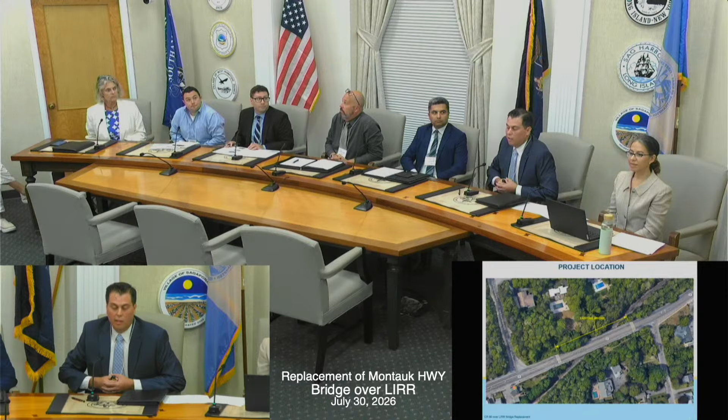Another issue we're dealing with on site is a lot of existing utilities. There are high-tension power lines that run along the railroad corridor to the south. And one thing not immediately evident is a buried utility corridor on a very unique alignment. It starts on the north side of Montauk Highway near Old Riverhead Road, runs along the north, then crosses under the existing bridge and railroad, and runs along the south side of Montauk Highway.

The image is a bit small on the screen, but you can kind of see there's a tree clearing there where this critical utility corridor runs. This is a National Grid gas main that feeds the entirety east of this site, and it's also a Hampton Bays Water District water line. These cannot be disturbed, and they will not be disturbed. We're building around them, maintaining them in place.

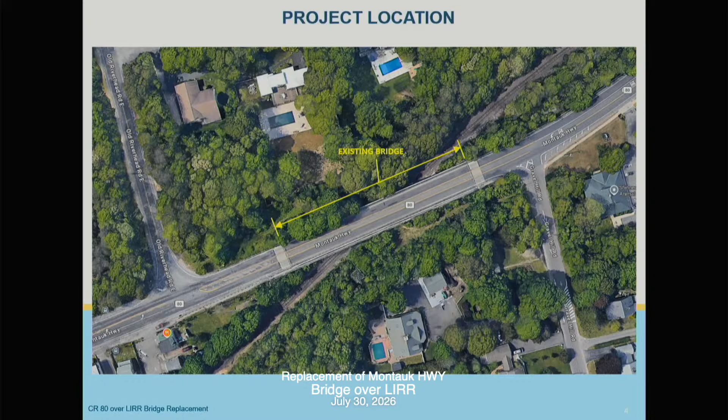Another challenge of the site is the extremely sharp skew of the railroad under the existing bridge. You can see that here - the geometry is very unique. That presented a lot of challenges for the original structure that's there now, and it will present a lot of challenges for us as we work around all these existing features on site.

If we jump down onto the roadway itself and take a look, Montauk Highway at this point is on a vertical curve. That's to get us up and over the railroad to provide clearance for the trains underneath. We have the existing sidewalk on the south side of the structure.

I'd like to point out the two girders that extend above the bridge deck. These are the main two supports - the entire bridge is carried by these two lines of girders. There's one protruding near the sidewalk, and one on the far left side of the screen. Those are about 8 feet deep, running the entire 330 feet of the bridge, supporting the entire thing.

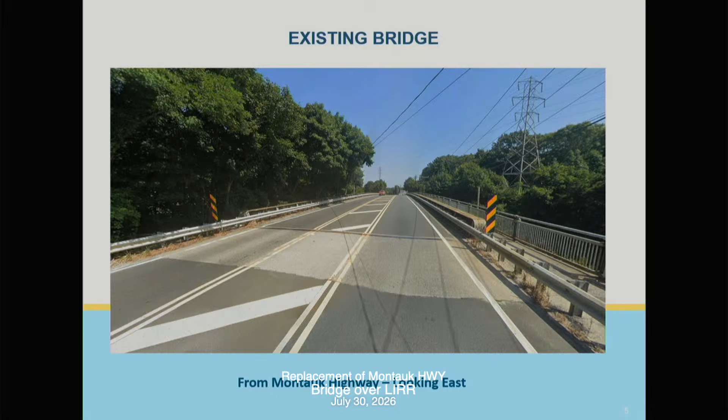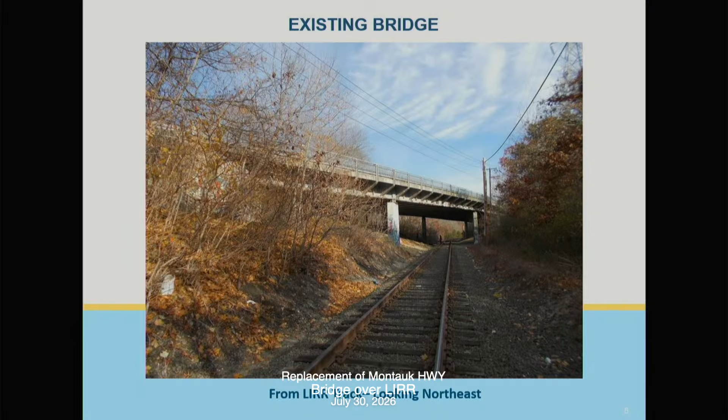Here's a view of the bridge that most people don't see, maybe the train conductor - we're looking at it from the underside. You can see the individual and staggered piers - there are 8 piers here. The bridge is actually a 5-span bridge. The piers we're looking at are staggered to provide horizontal clearance for the railroad as we're looking down the track. They're also staggered to miss that utility corridor running perpendicular to the track, from the northwest quadrant to the southeast quadrant.

I think this image is useful - these rail workers are standing right where the gas main is. That gas main runs down a steep slope, crosses under the existing track, and runs back up the other side of the slope. You also get somewhat of a sense of the scale of this structure. It is massive - demolition of it is going to be a challenge, and it is very uniquely supported with those staggered piers.

So why do we need to touch this bridge? It has really reached the end of its useful service life. It was built in the early 30s, rehabilitated in the late 80s, and as Kyle mentioned, it is the lowest rated bridge maintained by the county.

We have ongoing steel section loss, concrete encasement deterioration, and the bearings no longer function properly. It's inadequately detailed for seismic events, and that sidewalk on the south side is only 4 feet wide, which is substandard.

The bridge is posted for no trucks with overweight permit. These are vehicles that exceed normal legal loads, but at one point this bridge could support those loads. That's a symptom of engineering evaluation, and it's been determined it can no longer support those loads, and that will continue as the bridge deteriorates.

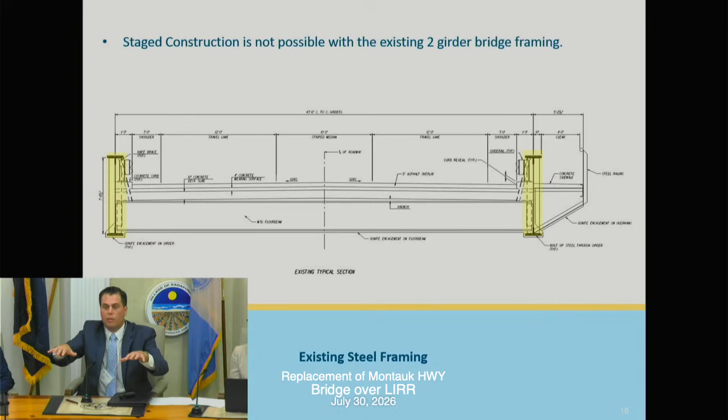We call that stage construction. Unfortunately, due to the framing of this bridge—the two girders that support everything and the deep steel floor beams that run between them—as soon as we remove a steel member, this bridge can no longer support traffic. That's the nature of this type of bridge framing; it's unusual for a roadway bridge.

Another thing we consider, as Kyle mentioned at the beginning, is temporary bridges. I'm going to jump back a few slides—I think it's most useful to look at the aerial plan view. Even for a single lane temporary bridge, the site is extremely tight. To install a temporary bridge, you'll have to realign the roadway locally.

Either north or south, in either case you have significant right-of-way impacts—properties would need to be taken. Additionally, that critical gas and water line corridor buried underground kind of spoils both the north side and the south side. Remember, the northwest quadrant and the southeast quadrant are each occupied by these critical buried utilities. There is a little bit more room on the north side—the utilities are still there, which is an issue, but there's a bit more room.

However, there's an important historical grave site 300 feet from the east abutment, just off screen here. A realigned roadway has the potential to impact that for a temporary bridge, and we're not going anywhere near that site—we are not touching it, we are not disturbing it, and we are staying within the footprint of this bridge that needs to be replaced for safety reasons. So unfortunately, we can't stage construction, we can't install a temporary bridge, and that leaves us, unfortunately, with the detour.

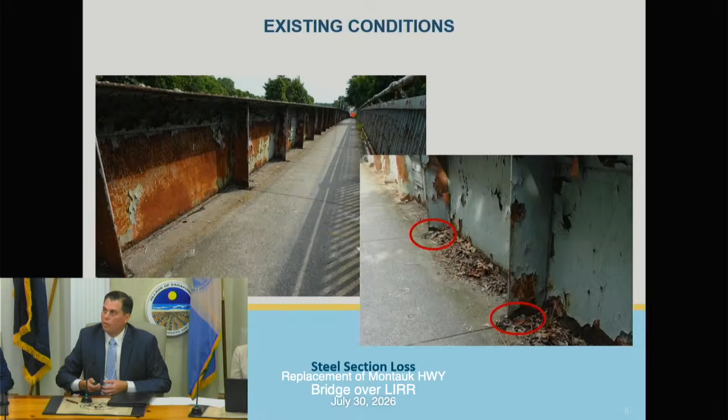Our main objective for the detour is, of course, safety. All of our design, number one priority is the safety of everyone. A second objective of the detour is to minimize it, and that goes to what I was describing as far as that early work, working underneath the bridge, getting as much done as we possibly can before we even need to detour the bridge.

A year plus of construction under the bridge before the detour is in place. Once the detour is required, the bridge is removed, utilizing those prefabricated elements to speed up construction and go as fast as we can.

We also understand that summer is incredibly important. That's the busy time. We don't want to impact summer. We've heard that feedback for some time. The detour is going to take place fall, winter, spring. That leaves us working in the wintertime. Those are difficult conditions for earthwork in particular and concrete work.

It's not the easy way of doing things. Building underneath the existing bridge with the bridge overhead is also not the easy way of doing things, and this is all being done in order to minimize that duration of detour.

Certainly the county and the design team and everyone here understands the concerns with traffic. There's very few east-west roadway options through this corridor. There's only two roads that cross the canal here. That's really just kind of the nature of the site.

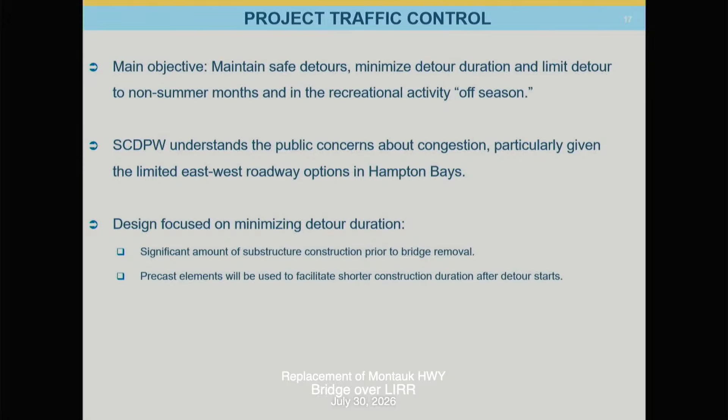Looking at the schedule, we do expect the contractor to be out there on site for up to two years. That start would be basically three years from now, summer of 2029. But the detour itself wouldn't start until fall of the following year, over four years from now. Again, there's a lot to do on the underside to prepare this site to accept this new structure configuration.

The estimated time for them to be off-site is summer of 2031. They can get the roadway reopened and go finish up some things while traffic's back on the bridge, away from the site. So that's your two years.

So it looks like seven to eight months of closure. The way I think of it is just after Labor Day and hopefully well before Memorial Day. Of course, a warm winter would be helpful. So if anyone knows any tricks for that, that would be good.

In order to facilitate the traffic movement through this detour, we're proposing temporary signals at Ponquogue and Fanning, at Wakeman and Fanning, and at Canoe Place and Fanning. That should help facilitate movement through this corridor.

That is a traffic model. It does assume that all traffic that would be on Montauk Highway will utilize Fanning Avenue. We are hoping to sign well east and west of the bridge to alert motorists that this is occurring, and hopefully they'll either stay on Sunrise Highway or choose to find Sunrise Highway through this corridor and avoid this detour route.

Could they make like a third lane on Sunrise? Can you guys organize with the state?

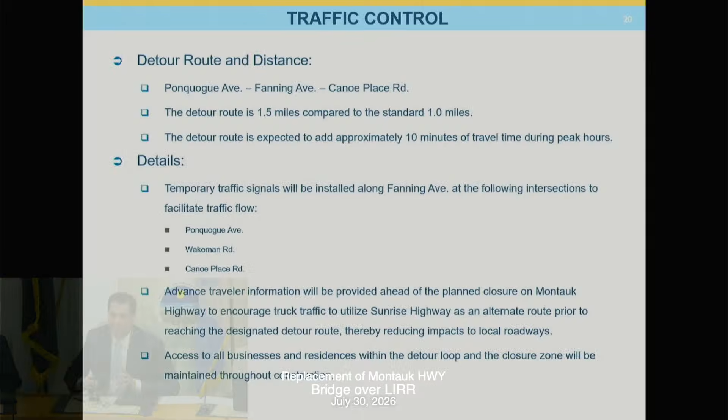Everything's going to be considered by the county, by the design team, and incorporated into the public outreach record. So please do fill out those cards.

We're going to take questions here in a moment. But if you're joining us online, or if you prefer email, you could email us at hamptonbaysoverpass@gmail.com. That's where we're collecting all the input. You could also mail the Caladium Group at the address shared on the screen. We're asking that all comments please come in by August 6th, as we're incorporating them into a design report that needs to keep the design on schedule, on track of this preliminary design phase.

With that, I'll turn it over to Leslie to help facilitate questions. Thank you to Bill and the county for that very informative presentation. We have quite a few people who have registered to ask questions and share comments. We want to make time to hear everybody's questions and comments, so we're going to call people in order and request that people limit their time to 3 minutes so we have time to hear everyone. If you didn't register to speak and thought of a question during the presentation, we'll leave time at the end for folks to raise their hand.

First registered to speak is Eileen McFallon with HBCA. Is Eileen here?

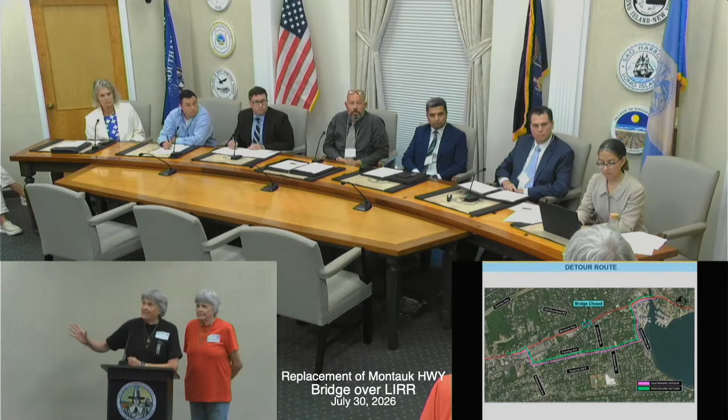Hi, my name is Lynn Murcott, and I live in Hampton Bays. I was wondering, has anybody here been to the Indian grave? There's a sign there, very old, and there's a missionary from the Shinnecock Nation also buried there. I believe there's an Indian grave plus a missionary. Has anybody been there? This is from like the 1800s? So you've seen it? Will that still be noticeable from the highway? Because my entire life we always looked over and saw that grave. Will you be putting stuff over it or blocking it? We have no intention of doing any work near the gravesite.

Okay, thank you. Hi, my name is Gail Murcott, and I live in Hampton Bays too.

I would like to say, I think it's an excellent suggestion, to keep the traffic on Sunrise Highway. Hampton Bays, I don't know if any of you have sat there and looked at the traffic from like 3 o'clock till like 8 or 9 o'clock at night. It's just a dead stop. We can't take any more traffic than we already have. So if you would look at keeping people on Sunrise Highway and closing that exit to Hampton Bays, I think that would be a really good thing to do to stop the extra added traffic that's just passing through.

The second thing I want to say is, if you're going to have a weekly meeting, it would be a great idea to have someone from the Town of Southampton attend that meeting so they could voice for us what's best for our community. That might not be your regular practice, but it's a great idea because their interests are our interests.

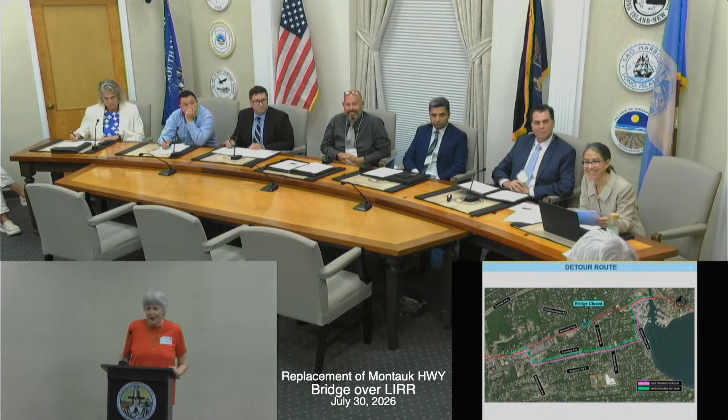Sure, we'll consider that. Okay, thank you, and thank you for being here too. Thank you for having this meeting, and we look forward to you coming to Hampton Bays so we don't have to travel here in the traffic.

I just want to step up for a moment. Tom Neely, Town Board Member. With regard to the question of coordination between the county and the town, we had a preliminary meeting about a month ago. The supervisor attended, the highway superintendent, his deputy was at the meeting, our town engineer was at the meeting. We had a number of town representatives there. The supervisor has asked that our town engineer be the point person on day-to-day contact, so we'll have regular communication.

We have our supervisor here at this meeting tonight. Obviously our county legislator and our state assemblyman are also here, and our highway superintendent is here. I think we're going to have pretty good coordination between the county and the town. It's their project, but we're going to make sure we're involved.

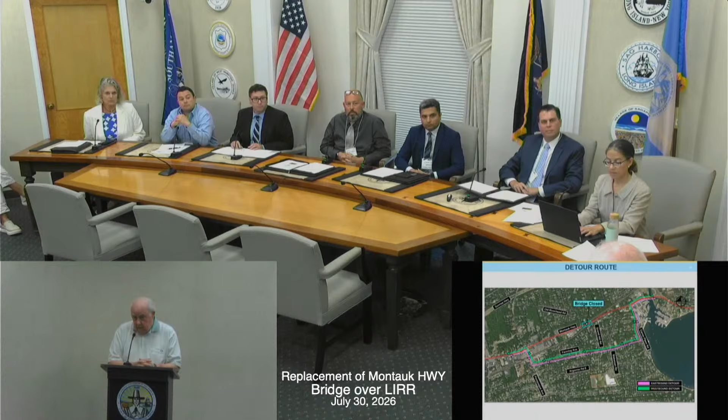I also want to say thank you for coming and hosting this meeting, and particularly to our county legislature. I'm an engineer, and I know your engineering undoubtedly was thorough, careful, thoughtful, might even be original, given some of the circumstances of the existing bridge. I can't really comment on any of that, but I'm sure you've done a job that maximizes the replacement of the bridge as well as it could be done. If that's true, then it comes down to: what's the fallout, the consequences of that? If traffic has to be diverted and the road closed for a period of time, it comes down to an evaluation of how you can minimize the damage to local residents.

And I was really happy to hear that you had modeled some traffic congestion and concluded that there was a 10-minute increase in travel time.

I have to be honest and say, that is not true. It just isn't. First, the time of year - you've obviously considered that summer is a peak season, and it is. But it's just an additional peak on top of an already saturated road system.

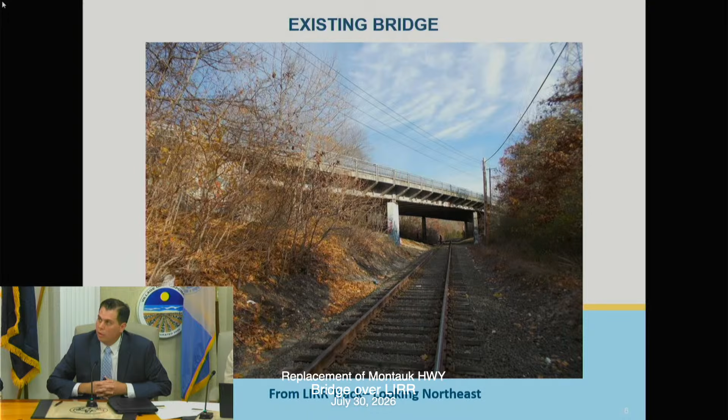Here's a view from the track. One thing to notice are the staggered supports of the bridge. They're staggered to provide clearance for that sharply skewed railroad alignment and to avoid the buried utility corridor I mentioned a moment ago.

I think this view is useful—you can get a sense of the scale of the bridge. It's massive, and it's going to be a challenge to demolish. Those railroad workers standing there are basically standing on that buried utility corridor, which runs down a slope under the existing rail and then up the other side. So the railroad is in a bit of a cut section.

Why do we need to touch this bridge? It is nearing the end of its service life. It's been out there for a very long time and it's deteriorating. Ultimately, we're replacing it for the safety of everyone who uses it and travels underneath it.

The bridge was built in the early 1930s and rehabbed in the late 1980s. It is the lowest rated bridge maintained by the county. We have ongoing steel section loss, concrete deterioration, and the bearings don't function. The details are inadequate for seismic events. There's a substandard sidewalk on the south side—it's not wide enough. The bridge is posted for no trucks with R permits, vehicles beyond normal legal load that this bridge could once carry. It's been evaluated that it can no longer support those, and that will continue as the bridge keeps deteriorating.

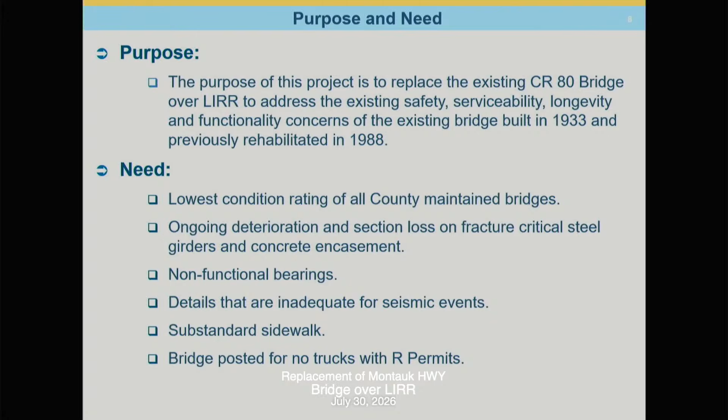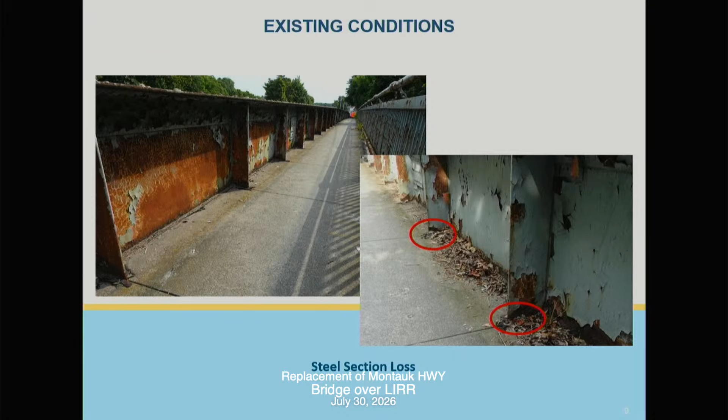And this is what we can see. There is a lot of the steel that's actually encased, and we can't get eyes on it.

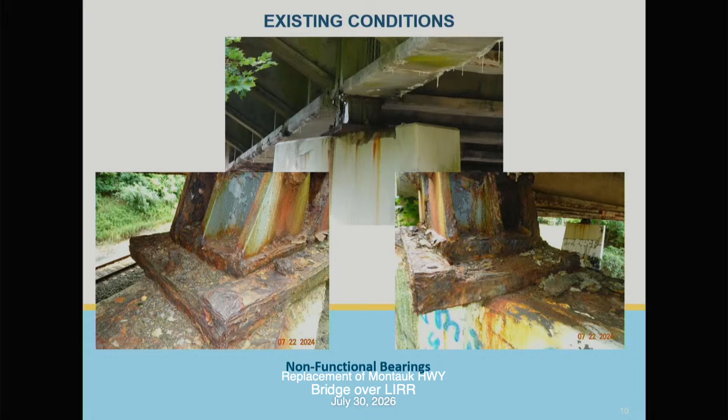The bridge bearings are there to allow the bridge to move, to expand in warm temperature, to contract in cold temperature. The bearings in this condition are completely frozen. They don't allow for that movement. The sliding surfaces are bound up with pack rust. The bridge still wants to move, and that generates a lot of force that is supported by the existing structure and the substructures.

So what are we proposing to do with the replacement structure? We're proposing to eliminate the safety concern that is the existing bridge and install a new structure that meets current standards. On the top side, we're going to still provide one lane of traffic in each direction with a sidewalk on the south side, to meet up with the adjacent east and west existing features as it is now.

We are also going to repave the area we're working in between Gravel Hill Road and Old Riverhead Road, and provide some additional clearance to the railroad as best we can. We can't provide much additional clearance because the bridge is already on a vertical curve that's basically maximized for those adjacent side streets' sight distances for drivers. We can't make that a steeper hill.

Critically, those buried utilities that are on site will remain in service throughout construction, and we'll be working around them.

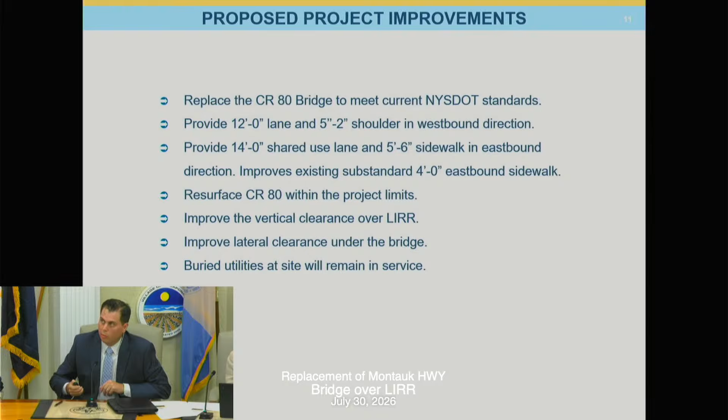We're basically going to build up as much underneath the bridge as we can until the existing bridge is in our way.

Once it comes time to remove the bridge, we're going to use precast elements that are fabricated off-site, shipped to the site, and dropped into place. You could think of it like Lego pieces to accelerate construction once the bridge is closed. Another benefit of this roughly 50-foot span is that railroad operation should not be impacted - we're far enough away that trains can continue to run even though we're excavating on either side of the tracks.

Once those pieces are in place, they'll form the 50-foot span. Everything will then need to be filled with earth, compacted, and the roadway reestablished.

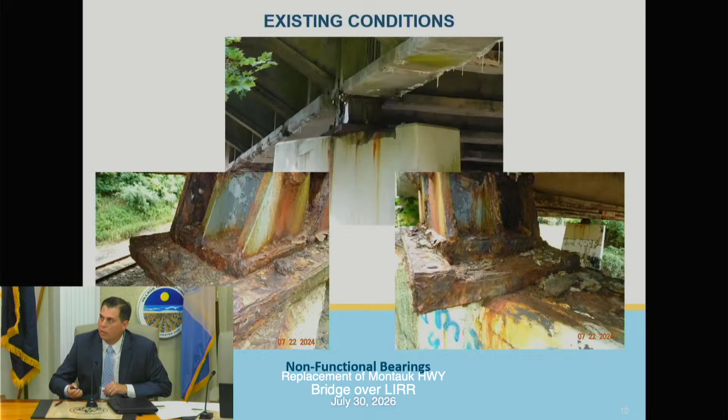That's not the only way we maintain traffic. We do install temporary bridges where we can, and that was thought of and vetted here. We did look into temporary bridges. I'm going to jump back to the actual site.

To install a temporary bridge, you have to realign the roadway locally to put the new section of roadway, the new bridge, either north or south of the footprint you'll be working in. The skew of the railroad makes that incredibly complicated and difficult here, but primarily, that very critical utility corridor exists in both the northwest quadrant of the site and the southeast quadrant of the site, which effectively spoils both alignments. There's nowhere to put foundations for a temporary bridge.

Additionally, right-of-way is also a concern. Any kind of realigned temporary structure would have right-of-way impacts. There is a bit more room on the north, but there's a very important historic site, the grave site of Reverend Paul Cuffee, just off screen, about 300 feet away from our project. A realigned roadway would have potential to get closer to that site than we want. We are going nowhere near that site. We are not impacting it in any way, staying 300 plus feet away with any of our work.

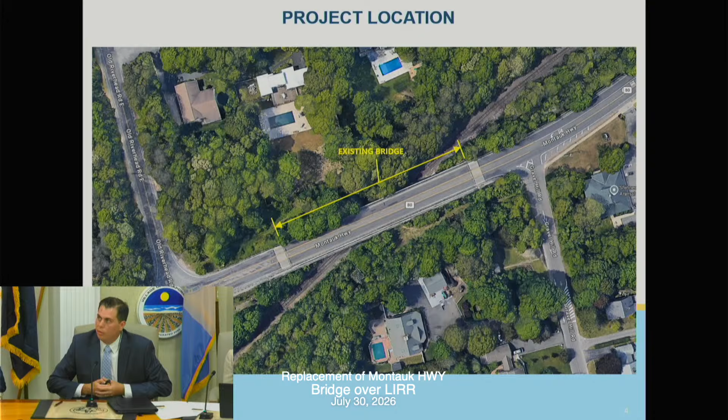So we can't install a temporary bridge due to all these reasons. We can't stage construction due to the bridge framing. That does unfortunately leave us with the need to detour the roadway. Of course, the primary objective is safety in everything we do, in all of our design.

Minimizing the detour duration is also a major driver of this project. It's really why this type of structure is being advanced - the ability to construct so much underneath, a year plus of construction prior to the detour, building as much as we can while keeping the bridge open, and utilizing those prefabricated elements once the bridge is removed to allow the contractor to move as quickly as possible.

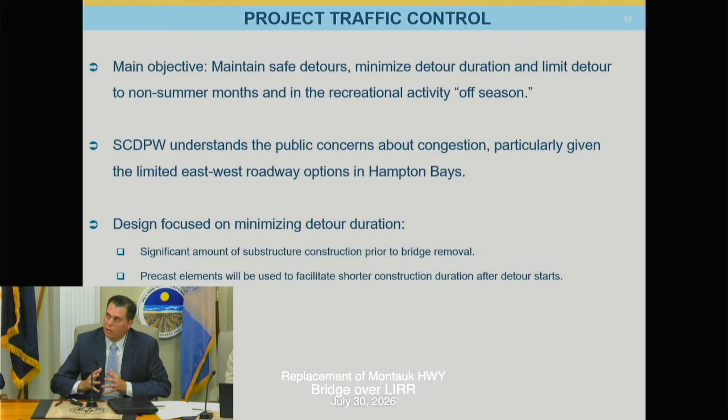We understand the importance of summer. We are scheduling the detour for fall, winter, spring, starting in fall. And that's not the easiest time to do construction work, both earthwork and concrete work. So the structure type itself, the difficulty of working with a bridge above us, and the difficulty in working in winter, that's all being done in order to minimize that detour duration and the impact on summer.

We certainly understand the concerns about congestion in the area, we've heard them after our first presentation. It's a very difficult corridor. There are very few roadway options, east and west. Only Sunrise Highway and Montauk Highway cross the canal. And traffic does need to move around locally along this route, and it needs to be signed to allow that movement.

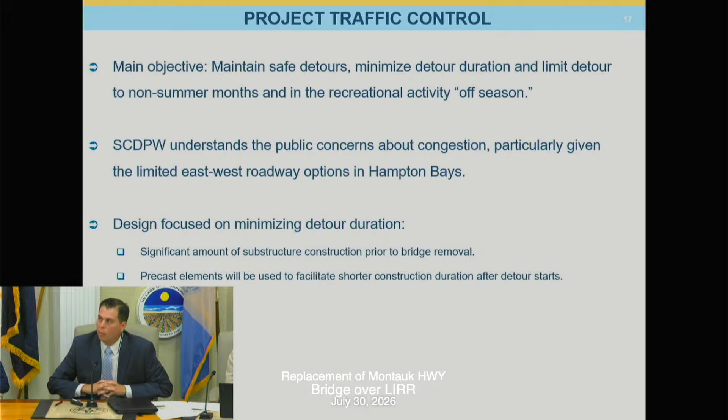So the schedule: construction start summer 2029, about 3 years from now, with the detour not beginning until fall of 2030. That's over a year of construction doing as much as we possibly can underneath the bridge prior to the detour, which is projected to take 7 to 8 months. And that is accounting for difficult winter weather conditions. Hopefully it's a warm winter and the detour could be shorter than anticipated. We expect the contractor to be off-site in the summer of 2031. So that's your 2 years of construction.

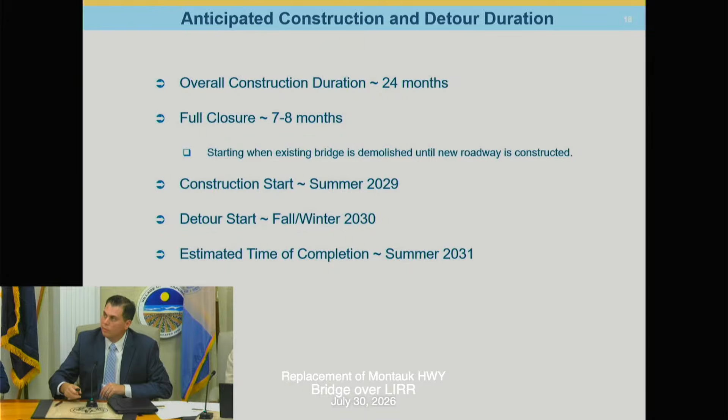That doesn't mean the roadway will still be closed in the summer. They need to go take care of some things away from the roadway after it's reopened.

The detour route - it's a little small up there on the screen, but the red line is Montauk Highway. If you're moving from left to right on the page heading east, the signed detour route will take you down Ponquogue Avenue, then down Fanning Avenue, and then back up Canoe Place to Montauk Highway. If you're heading west, it would be the reverse. To facilitate traffic movement along this corridor, we're proposing temporary traffic signals at Fanning and Canoe Place, Fanning and Wakeman Road, and Fanning and Ponquogue Avenue.

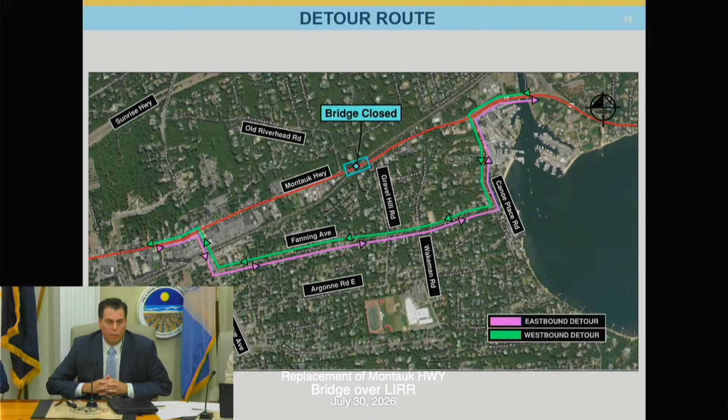The detour length is relatively short, but that's really not that important because it is the duration that matters. Current traffic models project approximately 10 minutes of additional travel delay during peak hours. It's just not accurate, no way near - local feedback tells us that may not be accurate.

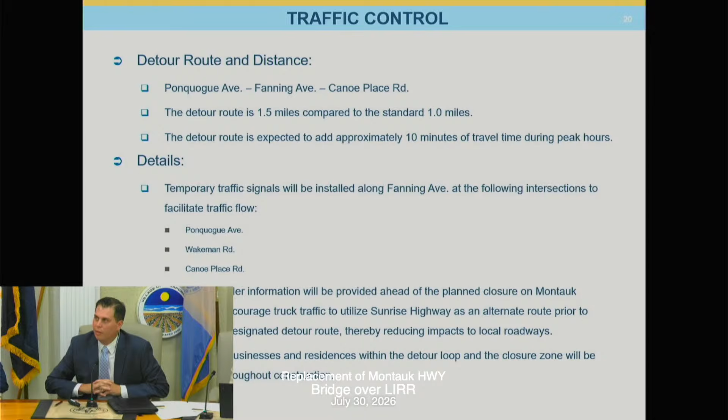But we are going to provide advanced signage east and west of the site that alerts people that this is in place, and is going to encourage folks who are on Sunrise Highway to stay on Sunrise Highway to get through this corridor, and encourage folks who are on Montauk Highway to find Sunrise Highway. So we don't anticipate that the full traffic that would have been on Montauk Highway will utilize Fanning.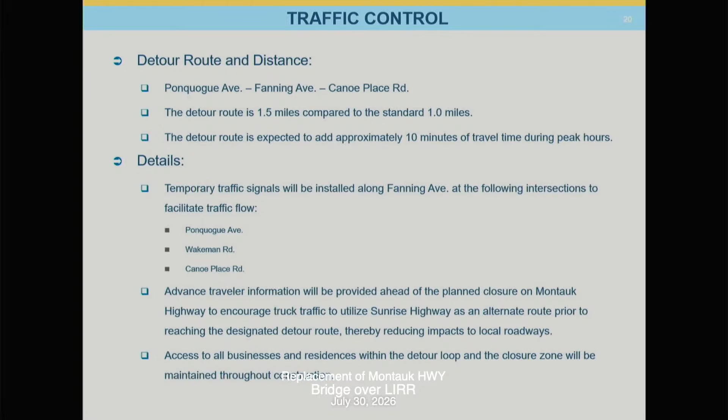All businesses and residences within the detour loop and the closure zone access will be maintained throughout construction. So those businesses that are very close to the site, just near Old Riverhead Road and Gravel Hill Road and along the whole stretch, will be accessible. You can drive down to them and access them.

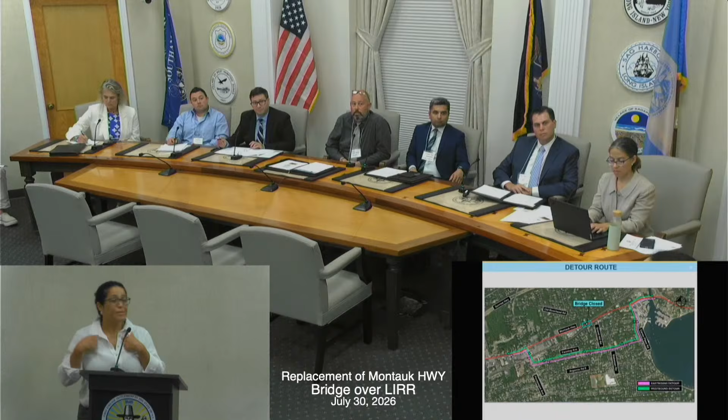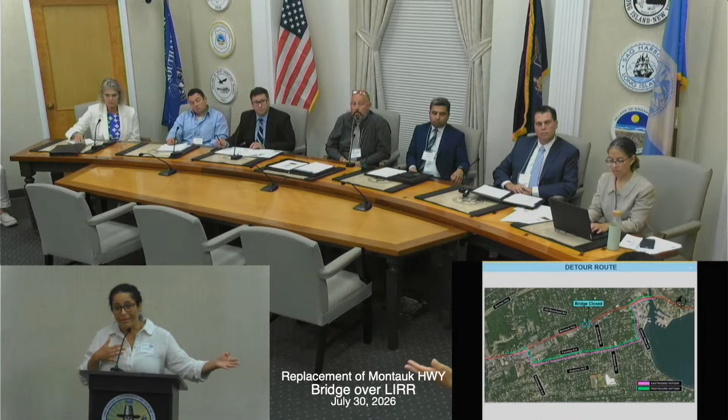So I know there were a couple of things suggested tonight about maybe getting off on the exit before. They're already doing that, and that's why you are experiencing it. So they're going down by my house. I just want you to consider that it's not just limited to the local community. That's why they're experiencing it, because it's starting at my house all the way in Quogue and Westhampton.

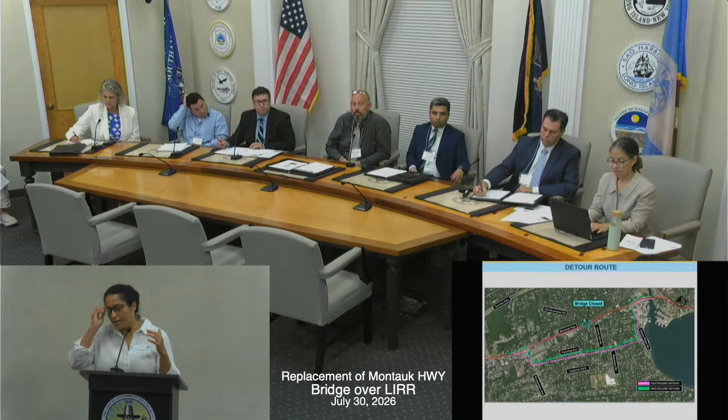The other thing I wanted to say is... no, I think I'll just leave it at that. But I know that the other bridges are also experiencing deterioration. Some of them were closed. I know Quogue was closed for a little bit, and obviously Ponquogue.

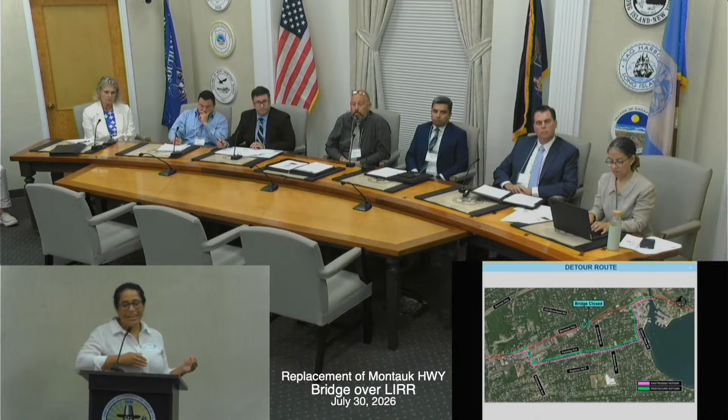So diverting the traffic from Montauk Highway so that they can look for other alternatives down to Ponquogue and all of that - I know that that's also going to be an issue because of weight limits. So just consider that the impact is not just about the people tonight, because I've heard a lot of Hampton Bays, but I'm here to offer that this is a bigger impact than Hampton Bays.

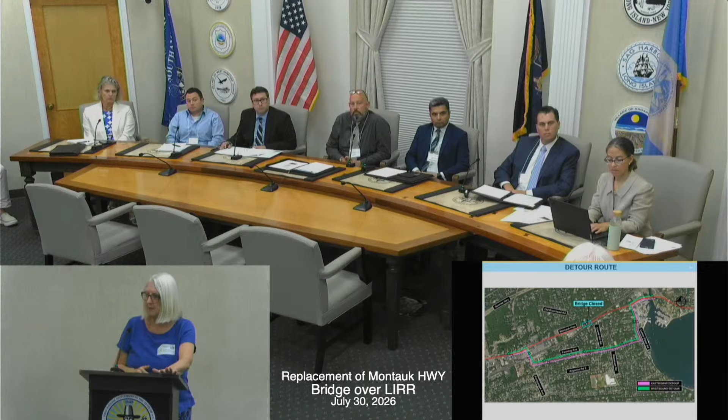But my problem is going to school in the morning when they were doing the bridge over County Road 39 - 55 minutes to get from Springville to the school. And that's no Montauk Highway, no Sunrise Highway, 55 minutes.

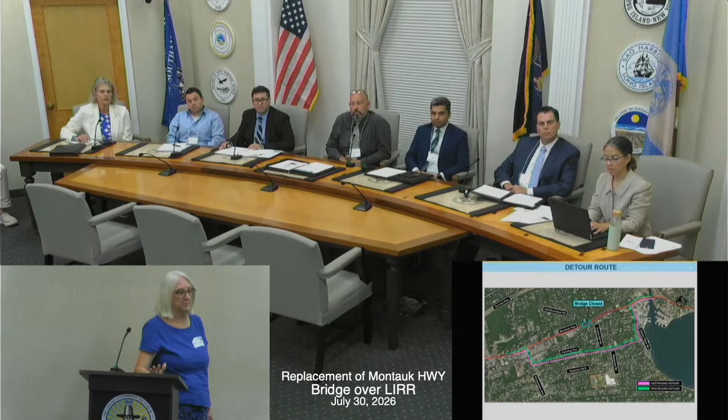That's ridiculous. Springville to the middle school or the high school? The high school, that's like a mile... is that even a mile? I think it's almost 2 miles. 55 minutes. Those are the feeder roads, because everybody's going into those feeders to get to Canoe Place Road.

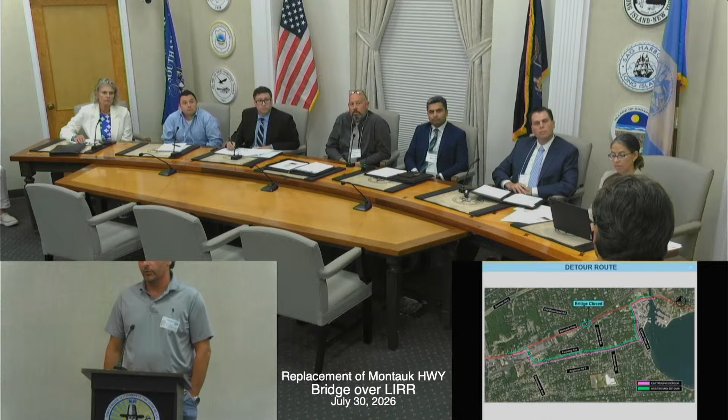My question is, are you planning to work with all these apps like Waze and Google Maps? Because I'm sure we can control any app, right? It's software. So are you planning to talk to them and make sure they're not sending people through other streets than the detour you create, so we don't fill all the other residential streets? We do involve the apps when we're closing a road or closing a bridge.

I don't know that we can direct them on where to send cars, but we'll certainly try. Maybe you can tell them there is a weight limit, and try to tell the apps, send people this road, don't send them there.

And I would like to go back to that emergency situation. If Fanning is used for east and west, and it's a dead stop in both ways, then there's no ambulance getting to it. So my question is, have you considered that Fanning is only used for heading east or west, and another street is used for the other direction? So you actually have the option to get a fire truck there, get an ambulance there. You have Argonne Avenue, we have Newtown Road, and I think that would help with the noise and the emergency situation.

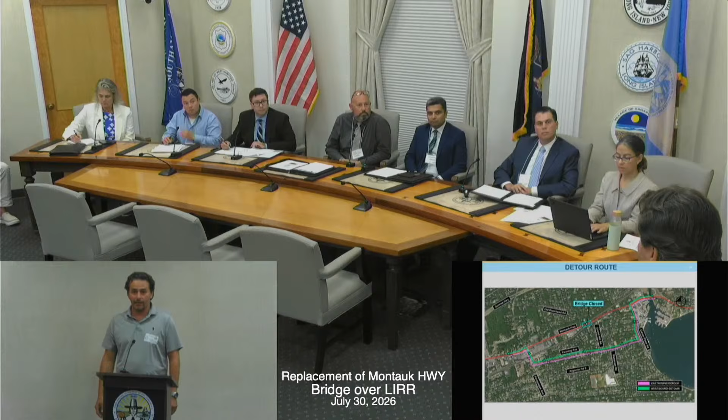I had my house on fire, and it's a scary thing. And if you know the fire truck is not getting there because the road is only wide for 2 cars, then you're just going to watch your house burn. So I think you guys should consider that too. Thank you. We will.

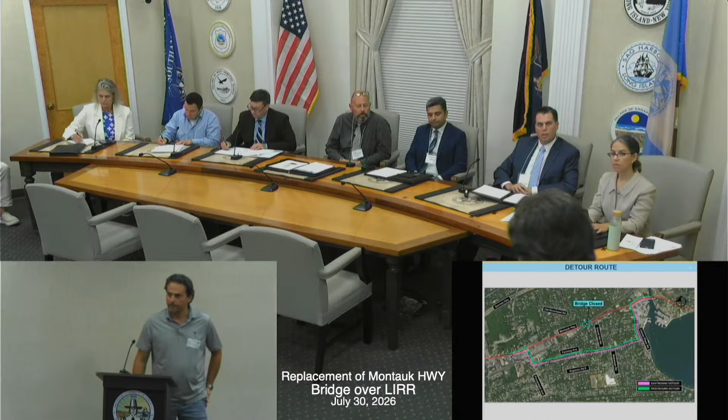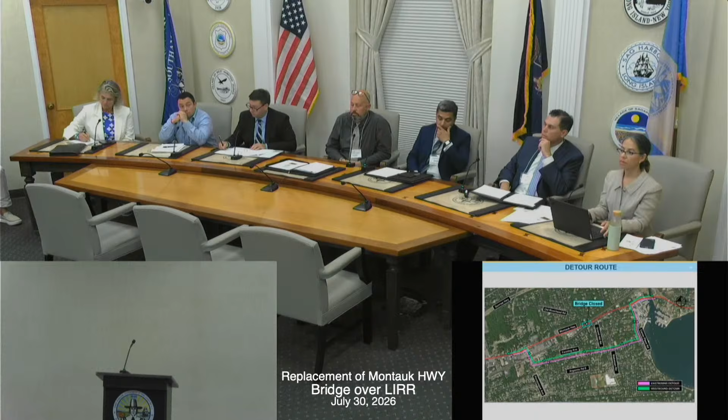My name is Charlie McArdle. I live in Hampton Bays. I happen to be the highway superintendent for Hampton Bays, Southampton, and so many good comments, so many not so good.

But I've sat in your seat. I know all about what's going on here. So I do have a few questions. One is, do you have an idea of how many cars in the morning go over that bridge? Yes, we do. What's the number? I don't remember off the top of my head, but we have done traffic counts just this June. If I told you 6,000 cars went over every morning, would that be close?

Morning, how many hours are you talking about? Well, we're out doing the cone program from 5:30 to 9:30. Yes, that sounds reasonable.

So on a regular day, Fanning Avenue is bumper to bumper from Ponquogue to get through, and again, people say you build it, they will come. The cone program we do at Canoe Place is very successful, too successful. It's sending people through East Quogue, through Quogue, down Dune Road, through every normal little street to get to the cones because it works. The program we do in the afternoon on 39 works, except it's killing every side street to get to where it works.

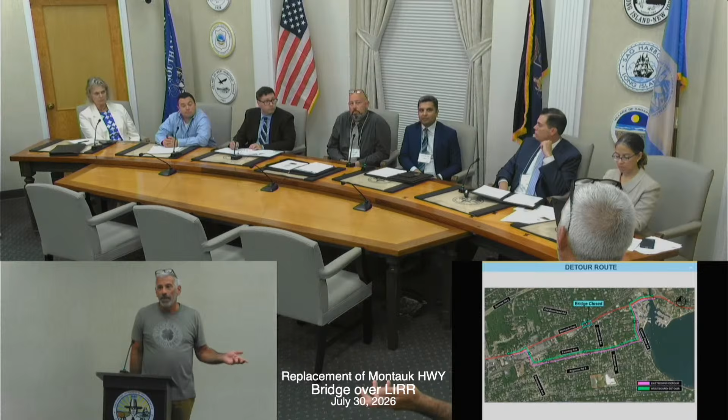Now, it's a great idea, the one-way. I like it. But the other one-way would be down Argonne, right past the high school. So we did think about that, and you have problems. Being near the school was one of the issues, yeah.

You also have great ideas about commercial traffic. People have been asking about restrictions of commercial traffic on Fanning. I didn't like the idea because it pushes it to Argonne, right past the high school. It's gotta be the whole town. You try to do it, you can put a sign up, and everybody in this room knows you could put signs up everywhere. If you don't have the enforcement, the signs mean nothing.

So my next question would be, is the county or the state gonna offer either money for the police to help move the traffic, or actually bring in law enforcement from the county or state to help with these detours? Because nobody is gonna listen. Now, I think offhand, the best idea is to keep all commercial traffic on Sunrise. They can loop around, get off the North Road if they have a delivery on the other side. If they have a delivery on the west side, do your delivery, but you're not going down Fanning, you're not going into that hamlet of Hampton Bays just to cut through.

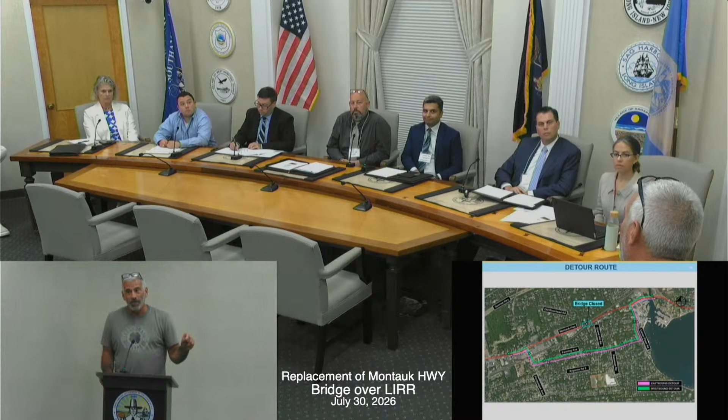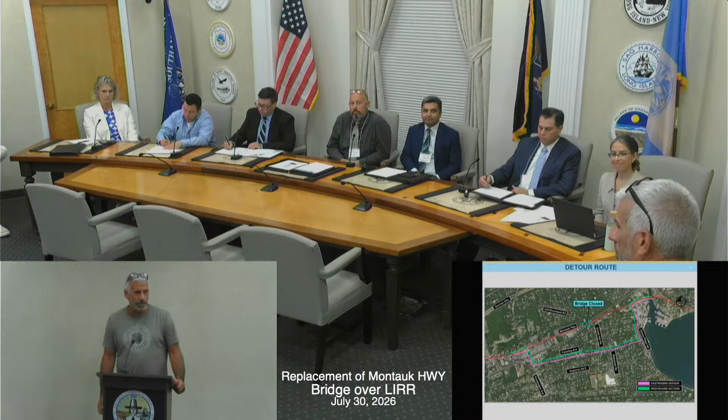That needs enforcement, so we're 3 years away. I think the best plan would be to keep all commercial traffic off these streets. A landscaper pulling his trailer can go on the North Road and around, or get off and do what he has to do in Hampton Bays, but he's not going down Fanning, Argonne, or Maryland. It's the only way it's going to work. These poor people on Fanning Avenue are getting destroyed now. You send 6,000 more vehicles down that street, you have a big problem. Good luck raising the property value. If I try to sell my house right now, who am I selling it to? Who's buying a house where you can't even get out of the driveway in the morning?

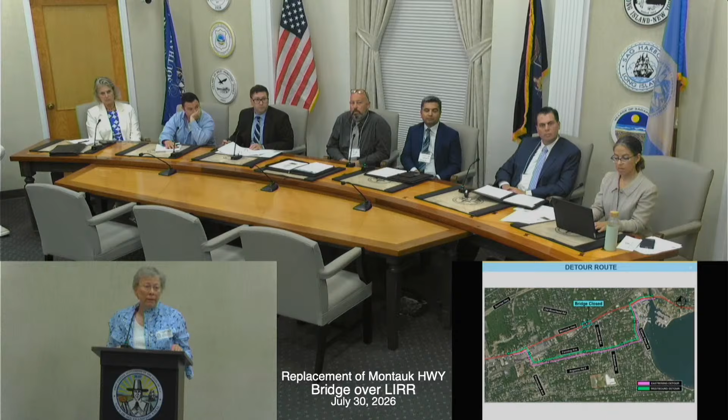My name is Marilyn Wilson, a retired teacher from Hampton Bays. I've lived at my residence for almost 35 years on Argonne Road. I've seen the traffic increase over the years, so it's now backed up to my driveway. I also talk to teachers still in the district. As a retired teacher, I don't have to go there anymore, but they, as others have said, are coming down Dune Road so they can get to the schools in Hampton Bays on time. That's in the morning; maybe at night it's a little easier. But it's a real struggle because so many teachers don't even live in the district anymore and have to get there to work. People have already talked about Fanning and Argonne because of the high school, but you have all that traffic now coming down Dune Road and filtering into all of those streets. It's a serious problem and it really needs to be looked at for the parents, teachers, staff, and students.

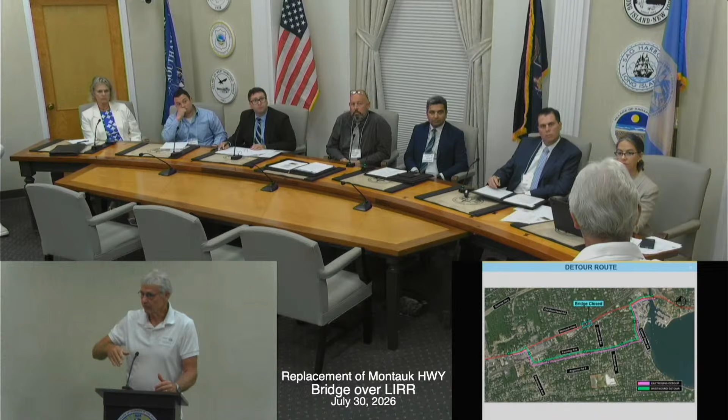My name is Russell Wilson, a resident of Hampton Bays living on Argonne Road. I wanted to echo some points made about Newtown. I know you said you'd put in traffic lights to handle some of this. Everybody looks on their phone for a shortcut now, not just residents who know the back roads, so all the merges are getting filled up no matter where they are. People are going to use Newtown Road regardless, but it's congested right now. If you eliminate eastbound traffic because the bridge will be closed, why couldn't you put a light at Newtown? Let those who want to go to Gravel Hill go right, but make it easy for everybody using Newtown Road to move across the bridge when their light is green. Why do they have to make a U-turn? Why can't we clean that up and just let them make a left right away?